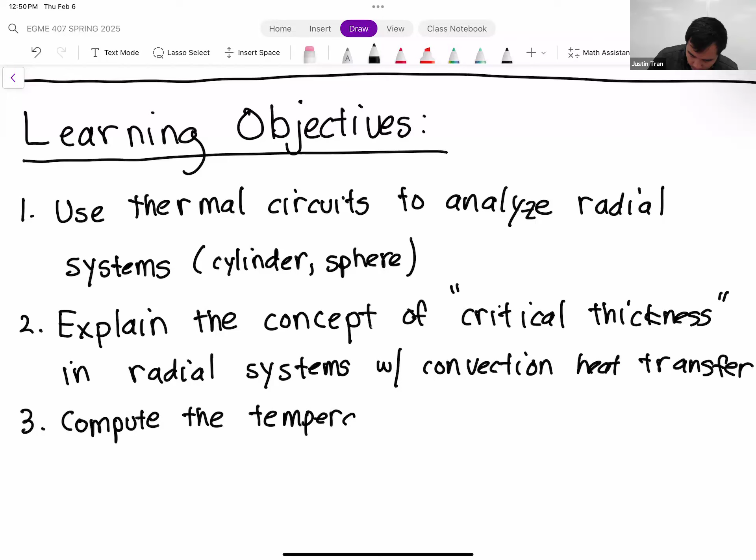That's so terrible. Man, inflation, even the Girl Scouts, huh? Even the nonprofits have to raise their prices. Same. Yeah, that's the problem, you can eat a whole box in one sitting. You could do that on purpose.

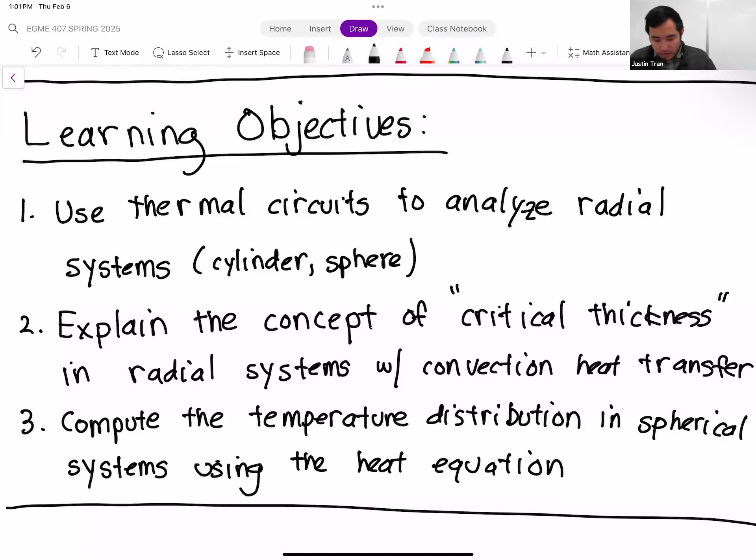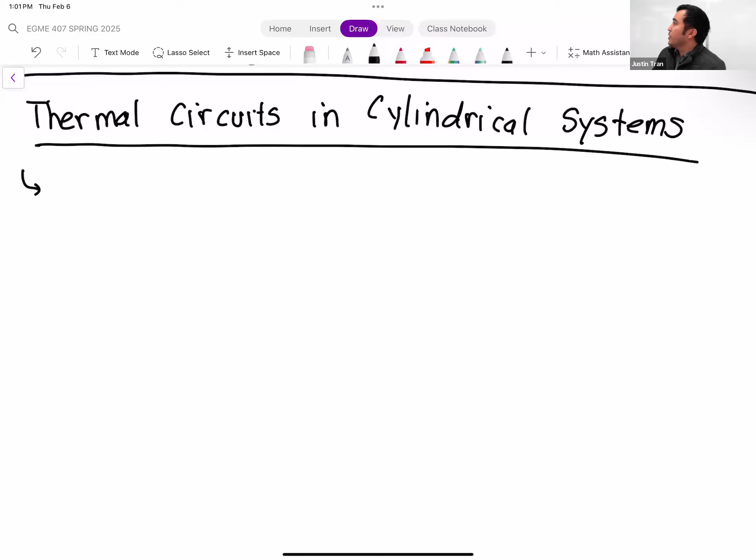All right, let's go ahead and get started. First thing we're going to cover is thermal circuits in cylindrical systems. This concept of thermal circuits that we first introduced in planar systems can also be used in cylindrical systems. Last lecture we didn't really do anything with it, but we did derive the equation for a thermal resistance in a cylinder.

Or I should say the conduction resistance. The situation we were looking at was this: if we look at a cross section of a cylindrical system, I won't draw the whole cylinder, just a slice. For a certain cylindrical system, we have an inner radius and an outer radius, an inner temperature Ti and outer temperature To. The radius at the inner part is Ri, and the radius at the outer portion is Ro.

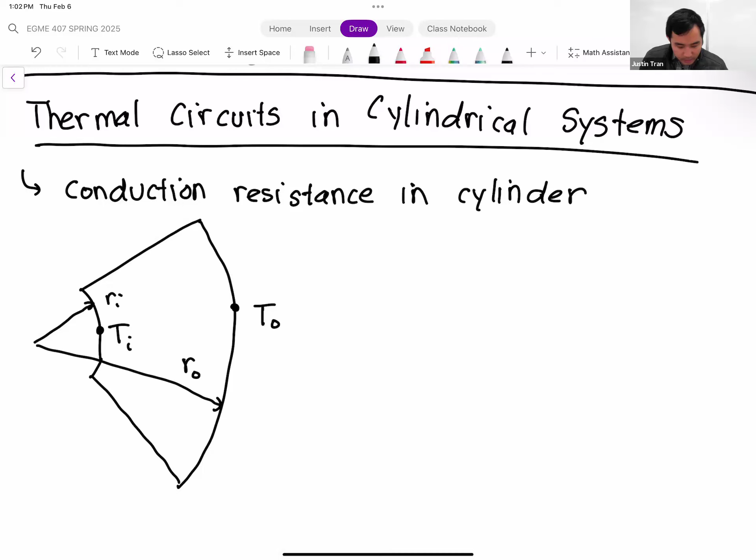So what we said last time is that we can compute this — let's say Ti is greater than To, so our inner surface is hotter than the outer surface. That's going to drive heat transfer outward. The equation we derived last time was that the heat transfer from the inner layer to the outer layer equals Ti minus To divided by the thermal resistance of that cylindrical layer. That resistance is the natural logarithm of Ro divided by Ri, divided by 2 pi K times the length of the cylinder.

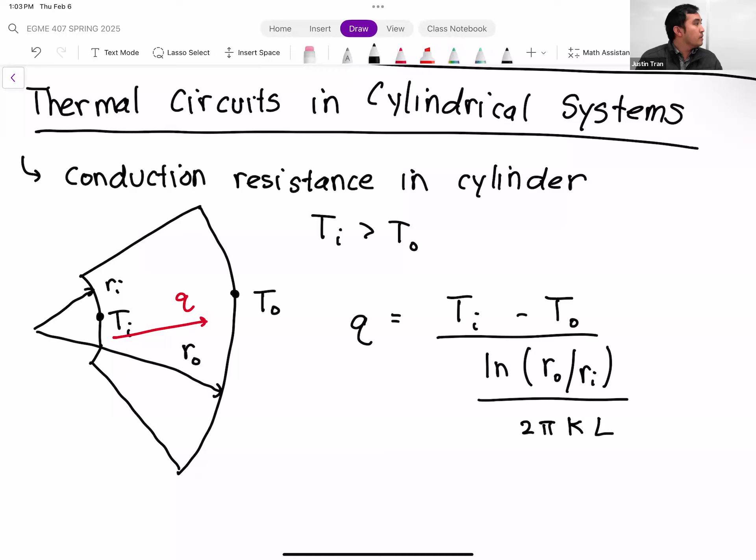And of course, the length of the cylinder — you can't really see it in this picture — but it's just the length in the direction going into the page. So this quantity right here is the conduction resistance of a cylinder.

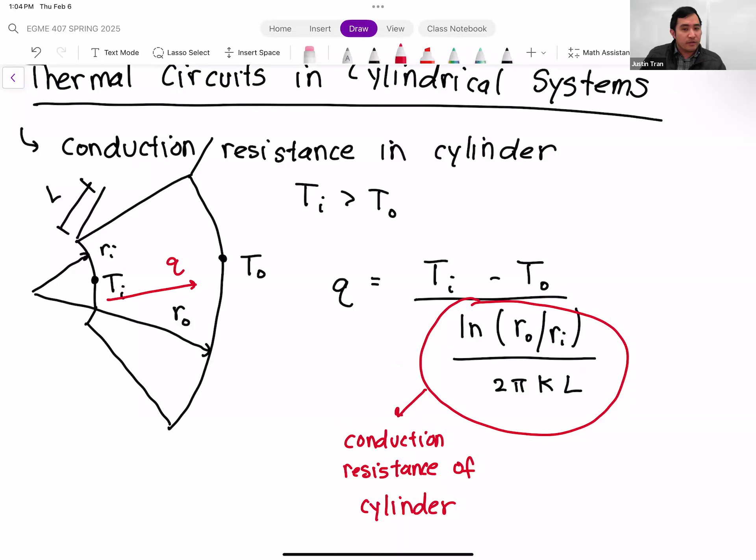Now, of course, this caveat here is assuming that the temperature is going from the inner part of the cylinder to the outer part — that part's really important. So I'm going to addend this to say this is the conduction resistance of a cylinder in the radial direction. Because there's a difference whether you have conduction going from the inner part of a cylinder to the outer part, or heat transfer going down the barrel of the cylinder — two different situations. This one is specifically just in the radial direction: heat transfer from the inside of a cylinder to the outside, or outside to inside. It works for either radial direction, but not going down the axial direction.

Okay, so let's see what this looks like in an example. Just like in the planar case, thermal resistance — question, yes? Does that inequality of the temperatures have to be true for that equation to be true? Not necessarily. If it's the other way around, if To is greater than Ti, the only thing that would change is that you would swap the order of these two terms. So you just want to make sure that the temperature difference is always positive.

So you do hot temperature minus cold temperature, but the conduction resistance itself doesn't change. What about the natural log? RO should be on top and RI would be in the denominator, so that one's always the same - you want RO over RI, because if the smaller radius was on top, the resistance would be negative.

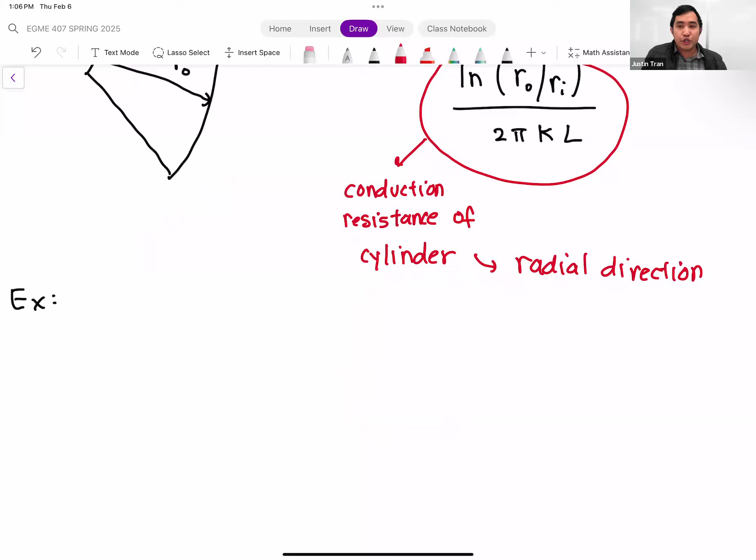Okay, so just like in the planar case, thermal resistances really shine when you have a multi-layer system. This is a common situation when you have multiple layers of different materials wrapped around the same cylinder. So let's say we have a situation like this.

This is quite common when you're doing some kind of thermal insulation. Maybe you have a pipe carrying some very hot liquid on the inside, and to protect the people on the outside, you have multiple layers of insulation covering this entire thing.

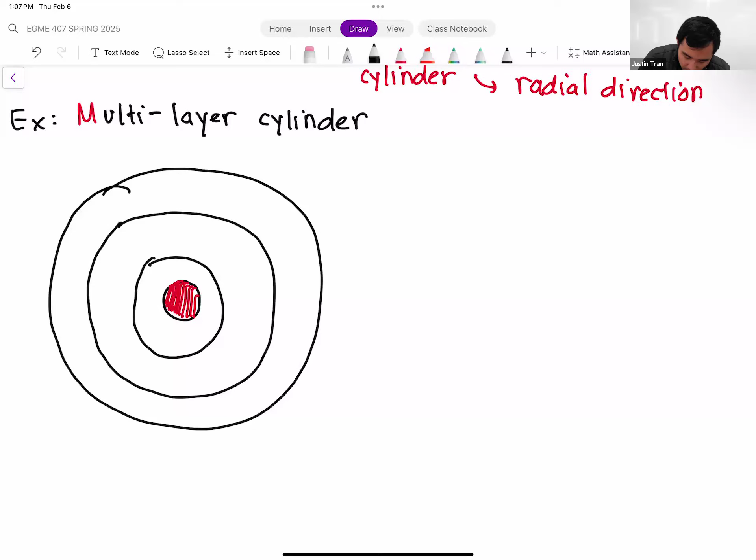Let's say this inner layer is really, really hot - I'll block it out like that. This layer has thermal conductivity Ka, this layer has Kb, and this third layer has thermal conductivity Kc. So we have 3 layers wrapped on top of each other. If we draw the radii here: this is R1, R2, R3, R4.

Other thing I'm going to draw here is, let's say we have convection on the outside - convection still exists in cylindrical systems. With convection we have a convection coefficient H, and the ambient temperature T infinity. One more thing we need: the temperature of the inner surface. Let's say at R1 we know that temperature, we'll call it Ti.

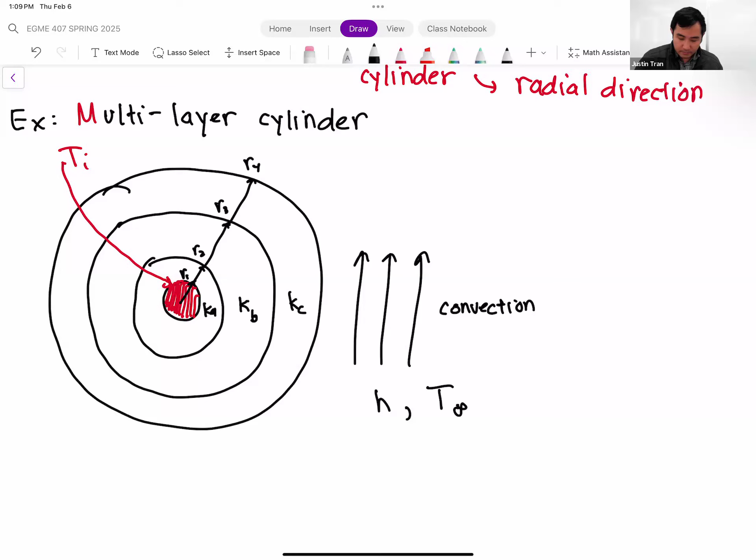So for this example, it's fairly straightforward, but let's write a question here. Let's come up with an expression - there's no numbers here since this example is meant to be fairly quick - that shows how much heat loss is coming from the inner part of the cylinder to the fluid.

Okay, so from the problem here, you can see it's asking for heat loss. Heat loss is just basically asking for Q - heat loss or heat gain is the same thing as heat transfer rate. So since we're solving for Q, if we scroll up here to our thermal resistance...

The easiest way to do that in this situation is to use a thermal circuit. The only difference here is that our thermal circuit is going to involve 4 resistors - we have 3 conduction resistors and 1 convection resistance.

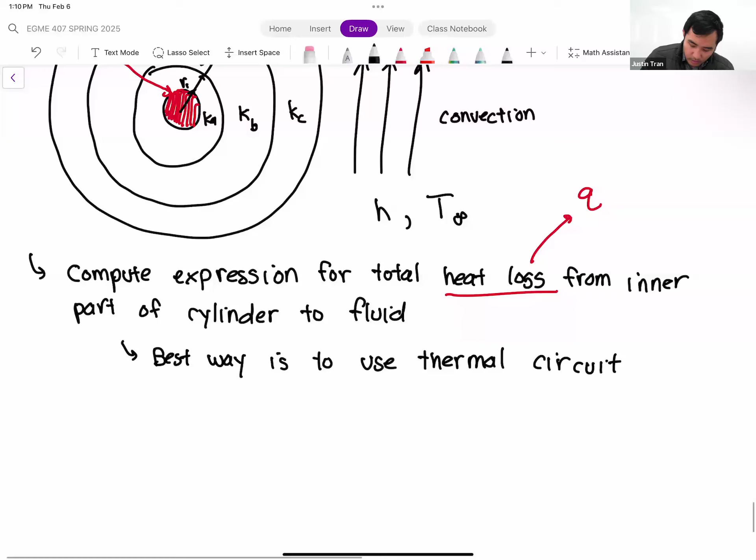Okay, so let's go ahead and draw the thermal circuit for this problem. Just like I noted, we're going to have 3 conduction layers. Each of those 3 conduction layers corresponds to our 3 materials: Ka, Kb, and Kc. And we're going to have 1 convection layer for the outermost one.

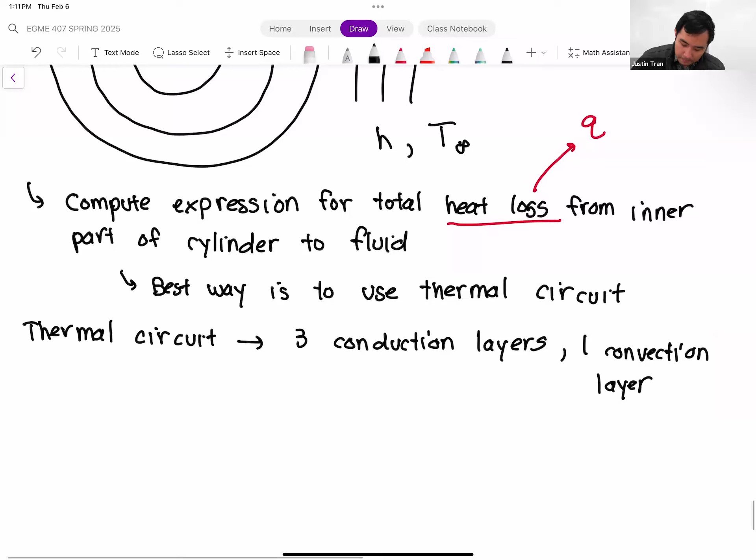So let's go and do that. Our leftmost node here is going to be Ti. Our outermost node here is going to be T infinity. And then in between those two nodes, we're going to draw our 4 resistors: 1, 2, 3, 4.

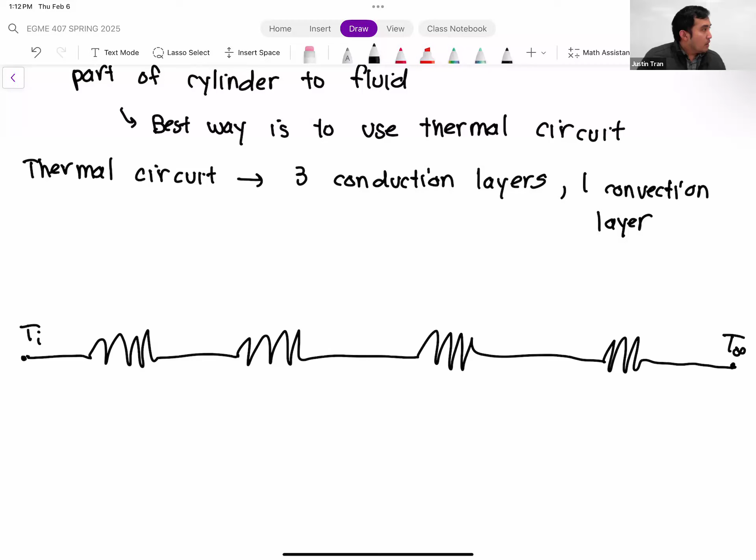All right, so let's go from the inside out. From the innermost layer bordering Ti, going to the next layer, we pass through material Ka, so we need the conduction resistance of that layer - this is going to be R conduction 1. Let's plug in our formula for conduction resistance.

So we have ln - the outer radius of that layer is R2, the inner radius of that layer is R1. So we have ln of R2 over R1, divided by 2 pi times K of that layer, which is Ka, times the length.

And we're going to assume that we know the length of this pipe here.

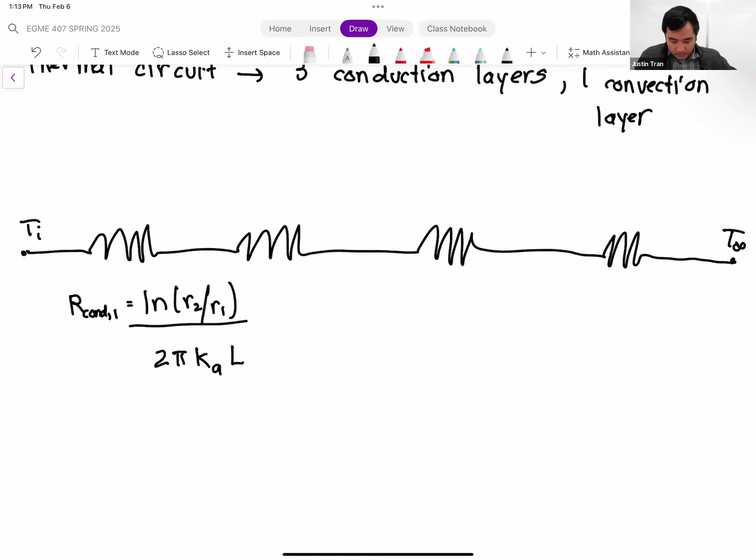Okay, so that's our first resistance, right? So going through material Ka.

Once we reach radius R2, we're going to pass through another layer, layer Kb. Let's go ahead and write out the conduction resistance for that. So our formula here is going to be the same, except we're just going to swap out the values here. So for layer B, we have ln of R3 divided by R2, divided by 2 pi Kb times L.

Once again, utilizing the same formula here, but with the different radii, because for layer B right here, the outer radius is R3, inner radius is R2, okay?

Our third resistor here is also a conduction resistance, and so we have natural logarithm of R4 divided by R3, divided by 2 pi Kc times L.

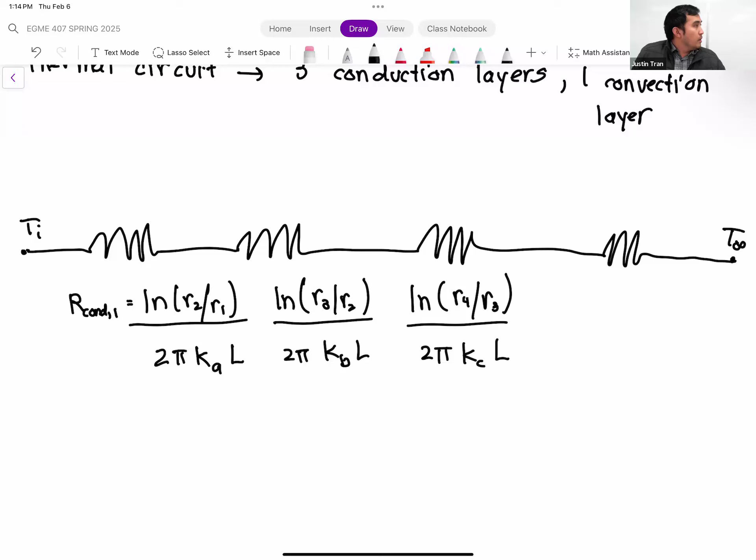So that's pretty straightforward. We have 3 conduction layers, 3 conduction resistances. You want to be careful here because it gets a little bit repetitive sometimes when you're applying the same formula. So just make sure, especially when you're plugging in numbers, you plug in the correct values for the radius and the correct values for thermal conductivity for each layer, right?

Just the way that heat transfer is, a lot of times we solve the problem first using symbols and then we plug the numbers in after. Just be careful as you're plugging numbers in, because it's easy to miss something in the details.

All right, any questions on this so far? What is the L? The L is the length of the cylinder going into the page.

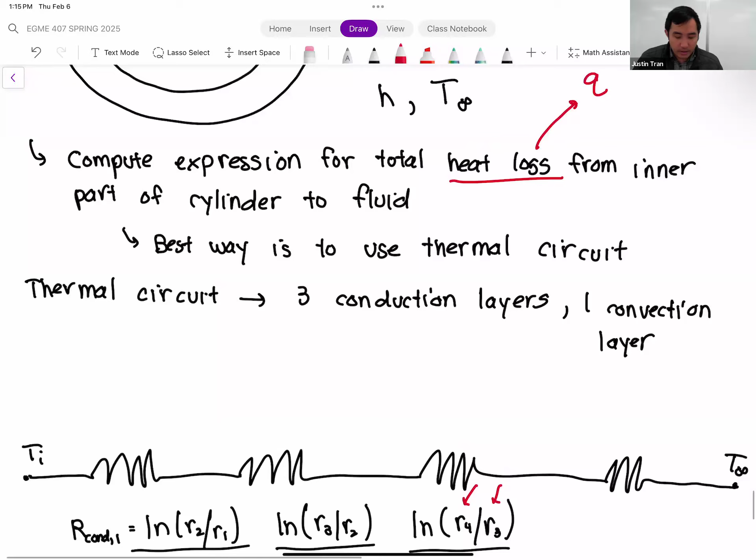It's a bit hard to see because I always just draw the cross section, but the cylinder actually goes into the page in that direction, so the L kind of represents that length.

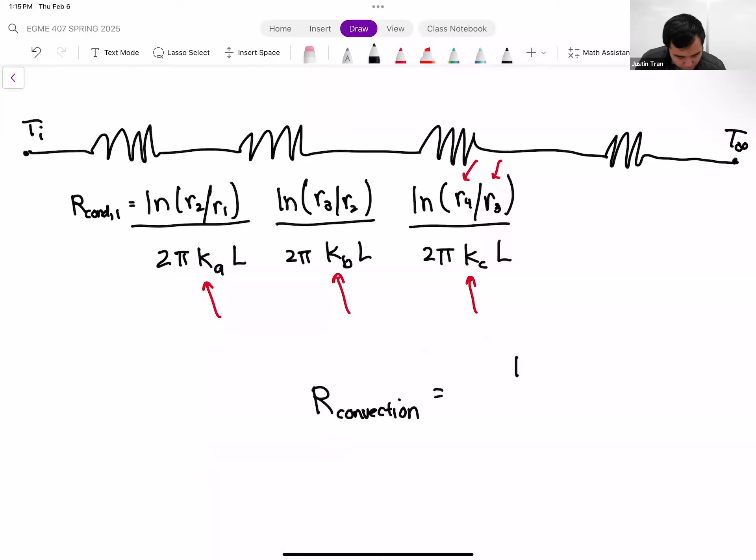So if you remember, our convection resistance was equal to 1 over H times A, where this A right here represented the cross-sectional area across which the heat transfer was taking place.

I want to bring this up again because in a planar situation, back when we were in good old Cartesian coordinates, we had convection going across here, and we had heat transfer coming out here. This cross-sectional area, if you look a little bit closer, was the area that was perpendicular to the direction of heat transfer.

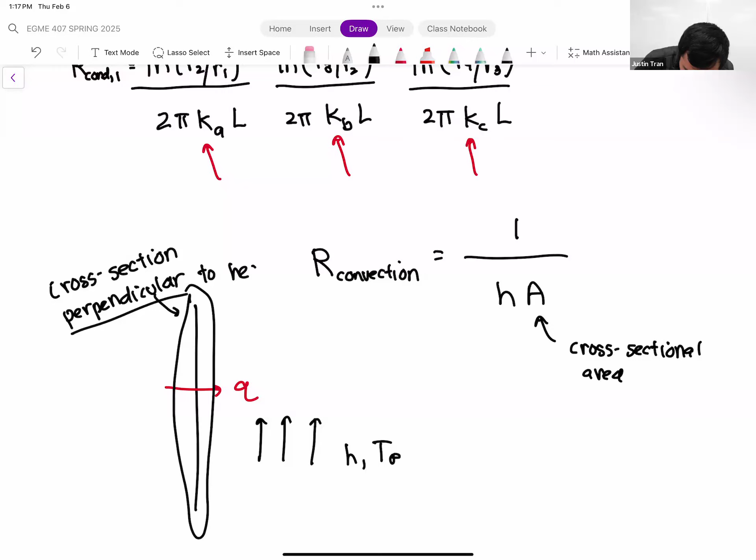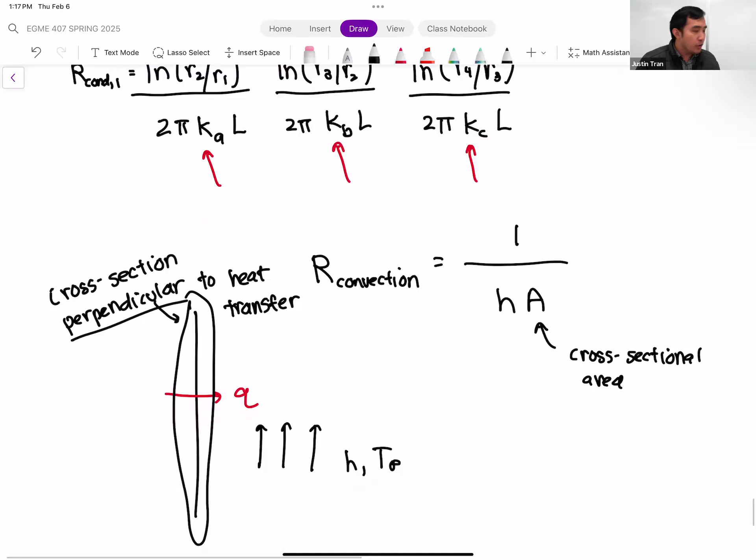So basically, we looked at the direction of Q, and then we found the area that was perpendicular to that, and that's the area that we plugged into our convection resistance here. Now you have to be careful with radial systems because you want to make sure that you plug in the correct area. So we're going to use the same formula here.

So this last resistance here is just 1 over H times A. But now the question is, what do we plug in for the area for this expression here?

So if we come back up to the diagram here, one thing you might say is, okay, the convection heat transfer is occurring on the outermost layer right here, right? So we have this circle here, which has radius R4. And so you might say, okay, that area that we're going to plug in should be pi R4 squared, because that's the area of a circle, right?

But if you look, that area is this one right here. That's the area that we kind of see in the page. That's not the area that's perpendicular to the heat transfer, because we know the heat transfer is going from inside out.

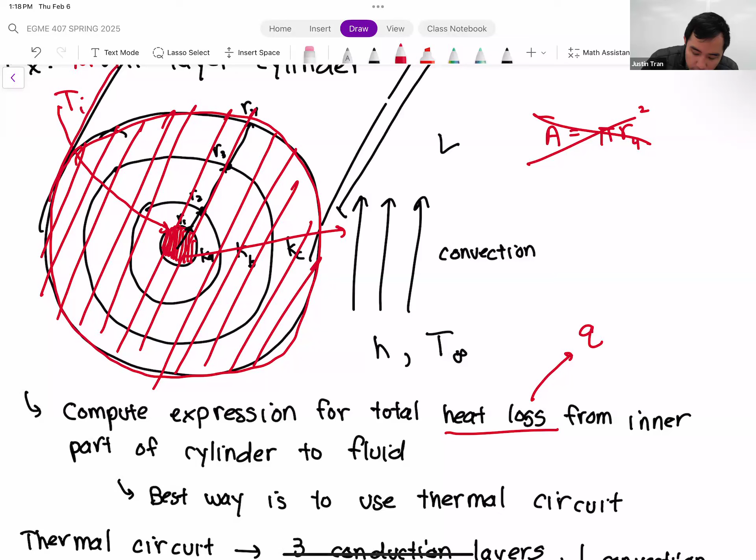So that area is not actually the area of the circle. The area that we actually want is actually the surface area of the cylinder on the outside. Specifically, it's the surface area of the cylinder that's bordering the fluid, or that touches the convection fluid.

In fact, there's a little bit of a hint in our conduction resistances too, because we partially have that area here. That area that we're plugging in there, the surface area, is 2 pi R4, which is the perimeter of the cylinder multiplied by the length of the cylinder.

You want to be careful because when you're computing convection resistances, you always want to compute surface area, because that is the area at which the heat transfer is going past. Later on, we're going to go over convection resistance for a sphere, and that's going to be kind of the same thing where we would use the surface area of the sphere as our area. Any questions on that? Why we choose that area there?

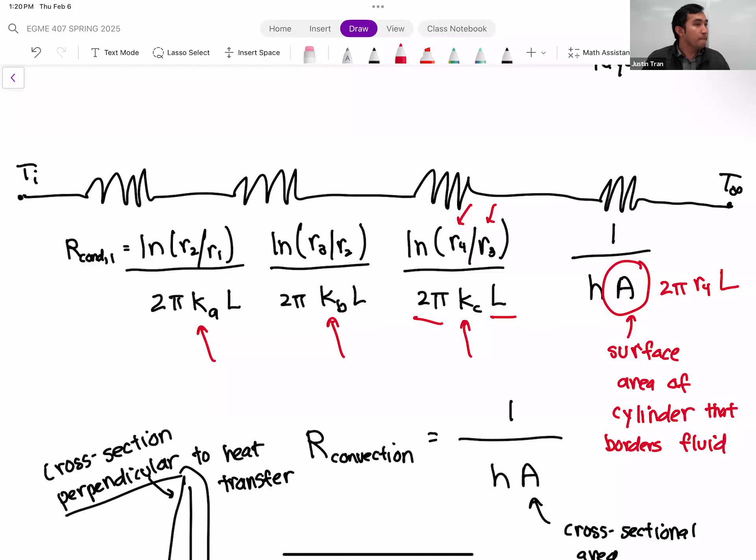Now that we have our thermal circuit complete, let's go ahead and write out our expression for the heat loss.

So Q loss here is going to be equal to, it's going to be a fairly long expression because we have 4 resistances, but we have Ti minus T infinity up top. And then on the bottom, we're going to sum up all of our resistances here. So we have natural logarithm of R2 divided by R1, divided by 2 pi Ka times L, plus natural logarithm of R3 divided by R2, divided by 2 pi Kb times L, plus natural logarithm of R4 divided by R3, divided by 2 pi Kc times L. It's even getting repetitive for me to just say all these natural logarithms. And then we have the convection resistance, so it's 1 over H times the surface area, which is 2 pi R4 L.

And of course, if you have numbers for all these things, you have numbers for the temperatures, the radii, the thermal properties, the convection coefficient, then you can plug in here and get a number for that.

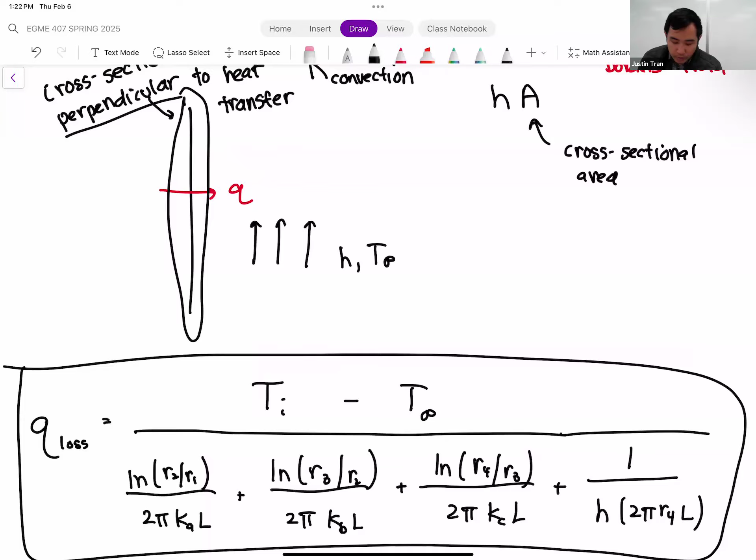Not quite, because the area is kind of always changing, right? Because the heat transfer is going radially outwards, the surface area for that heat transfer is actually changing quite a bit. In this case, you can pull out the L, so that is one thing you can pull out. If you look at every term here has an L. So you can do a heat transfer per length, which doesn't quite have a name. The heat transfer per area is called heat flux, but in this case, we can do heat transfer per length. So that is one thing you can do, but because that cross section is changing, it's a little bit harder to compute the heat flux. Thank you, good observation.

So that is thermal circuits in cylindrical systems. Now, before we move on to spherical systems, there is one thing that I do want to highlight here, which is actually quite fascinating. And that question kind of segues into that really nicely.

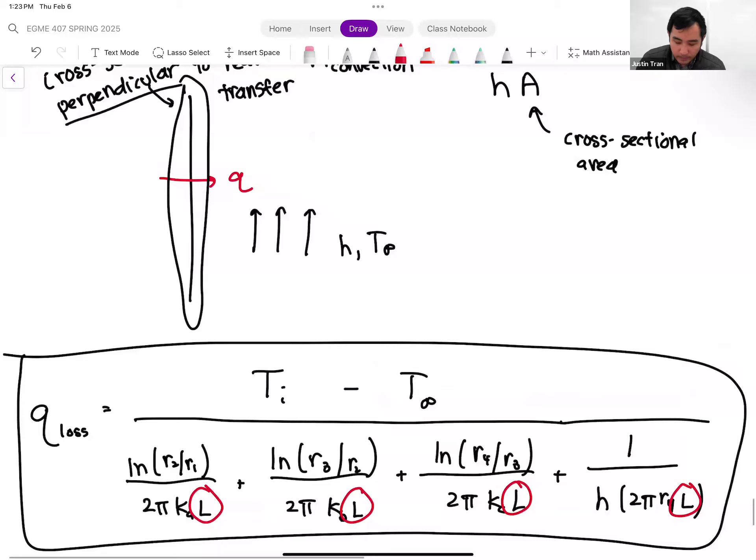Let me take that situation from above and draw a smaller version of it. I'm going to draw a version that just has one conduction layer and convection. So we have one cylinder with one layer here, and we have convection on the outside. We have an inner radius, outer radius. Convection, we'll assume we know everything about that - the convection coefficient and the ambient temperature. And we'll assume that we know the inner temperature of the inner cylinder, Ti.

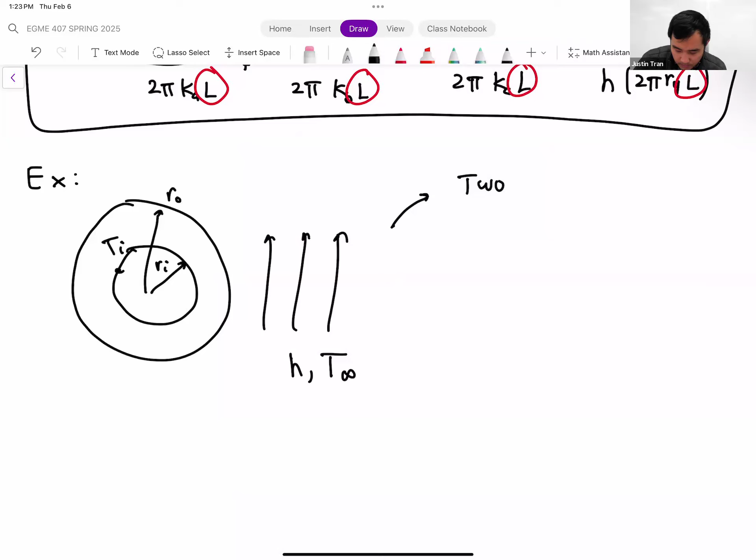So this system right here has two resistances: one conduction resistance, one convection resistance. I'm not going to draw the circuit just because it's very obvious, but I do want to write out the expression for both of the resistances. So we have conduction resistance is equal to natural logarithm of ro divided by ri, divided by 2 pi K times L. And then convection resistance for a cylinder is 1 over H times 2 pi ro times L.

So similar situation as the last time, I just took off two of the layers here. So why are we looking at a simplified version of the last example? I want to highlight one particular variable here.

Which is the outer radius. You can see the outer radius actually appears in both expressions here, in the conduction resistance and the convection resistance. But the position, or where that outer radius actually shows up in both equations, is actually different.

If you look at the conduction resistance, the outer radius appears in the numerator of that expression. Now we're taking the natural logarithm of it, so that's going to affect its value, but at the end of the day, it is in the numerator.

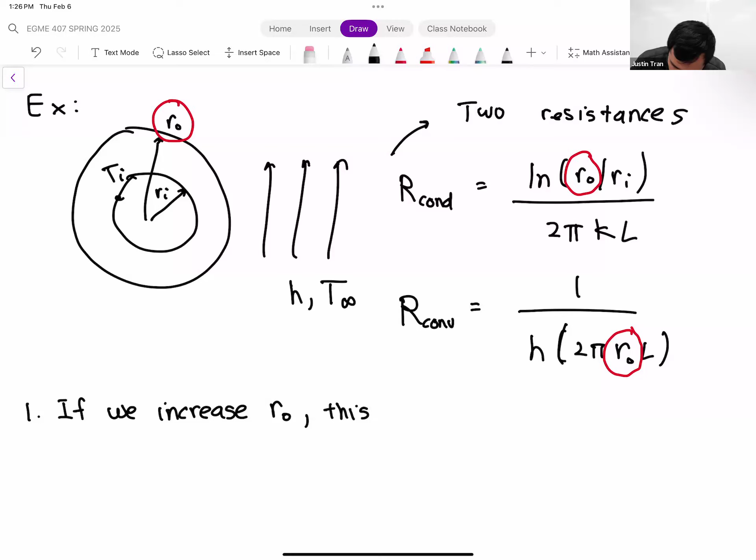That intuitively makes sense, right? If you think about the situation from last time, if you have a very hot fluid on the inside, you want to insulate the outside so you don't burn yourself when you touch the pipe. The instinctive thing to do is just to make the insulation thicker. If you make the insulation thicker, it's going to cause more resistance to heat transfer, and it's going to overall reduce the amount of heat loss that comes out. So that makes sense.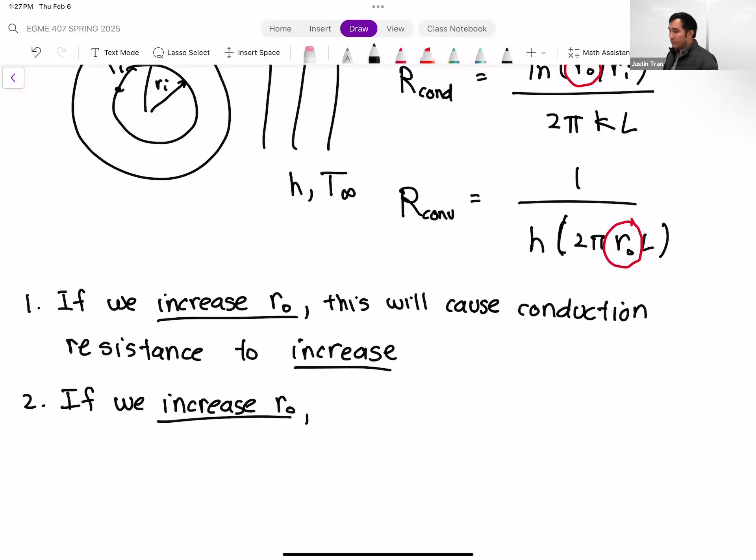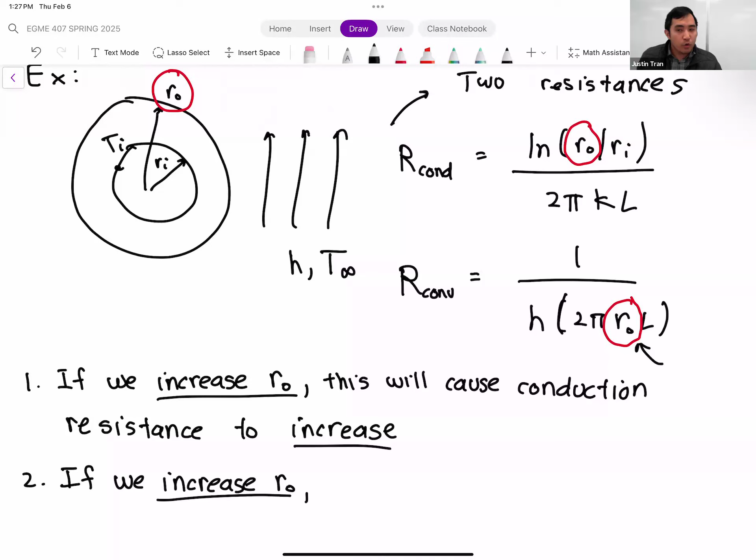But if you look at the convection resistance, and if we consider the same phenomenon, let's say if we increase Ro, so we make the cylinder thicker. But if you look at the formula for the convection resistance, Ro is actually in the denominator. So what does that mean? If you make your denominator bigger, that's going to make your quantity smaller. So the convection resistance actually has the opposite effect. If we increase Ro, this will cause the convection resistance to decrease.

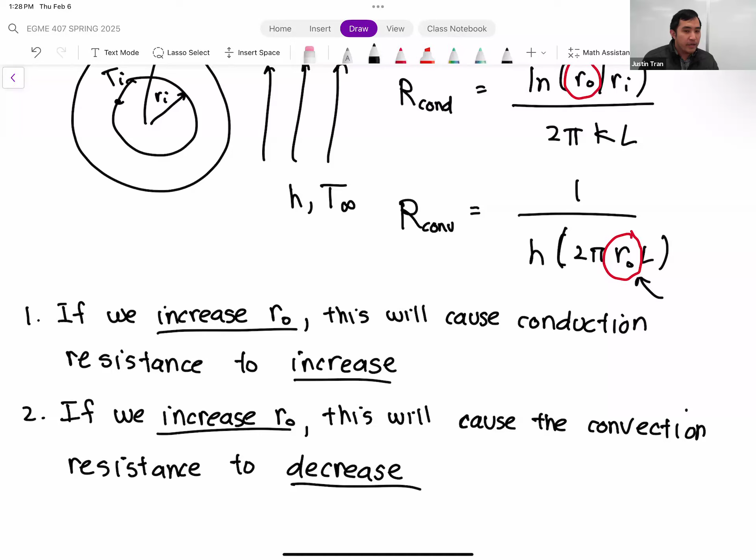Now that seems like kind of a paradoxical thing. But if you think about the way convection works, convection is a surface effect. Convection basically tells you how much heat is being lost to a fluid that's in contact with the surface. Now radial systems are unique in that as you increase the radius of a radial system, you take a cylinder, you increase its radius, you're also increasing the surface area. And increasing the surface area means that there's just more places or more area for the cylinder to lose heat due to convection.

So this connection between surface area and convection heat transfer is actually a very important, I would say, design consideration when you're thinking of thermal systems. I'm going to jump ahead a little bit.

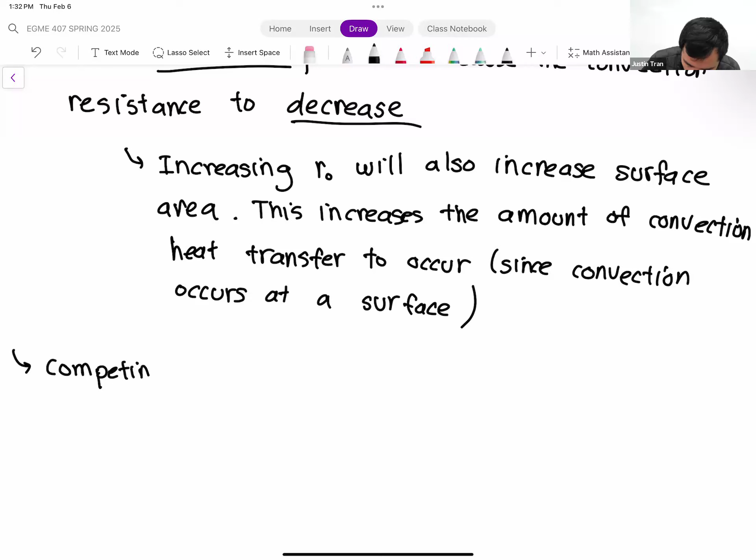So on the one hand, if you increase the radius, you're making it harder for conduction heat transfer to occur, but you're also making it easier for convection heat transfer to occur.

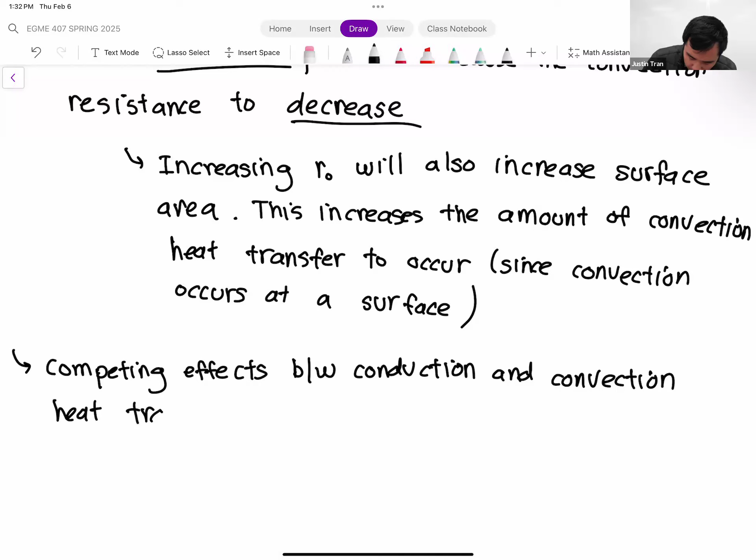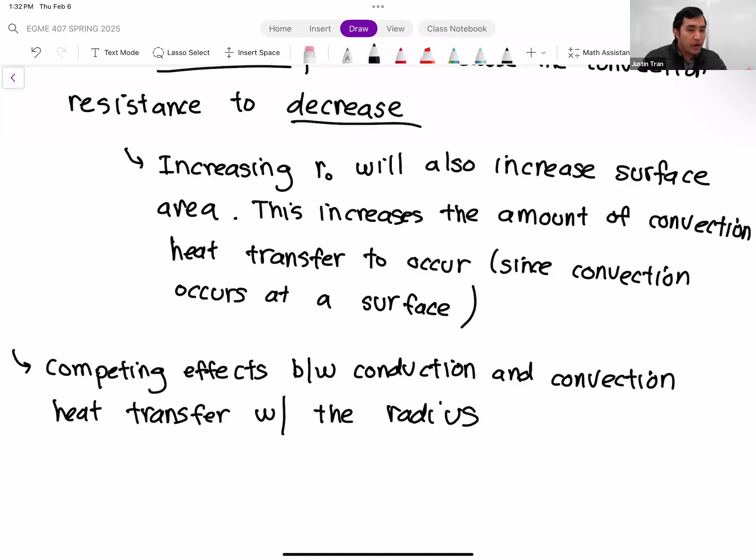Competing effects is one of the most fascinating things that can occur, in science, economics, finances—whenever you have two things competing, it means whenever you do one thing, you're trading off the other. One thing this always implies is that there's always some kind of sweet spot.

So whenever you have two competing effects shown mathematically, there should be some kind of sweet spot where both effects are minimized, or there's a nice balance between the two.

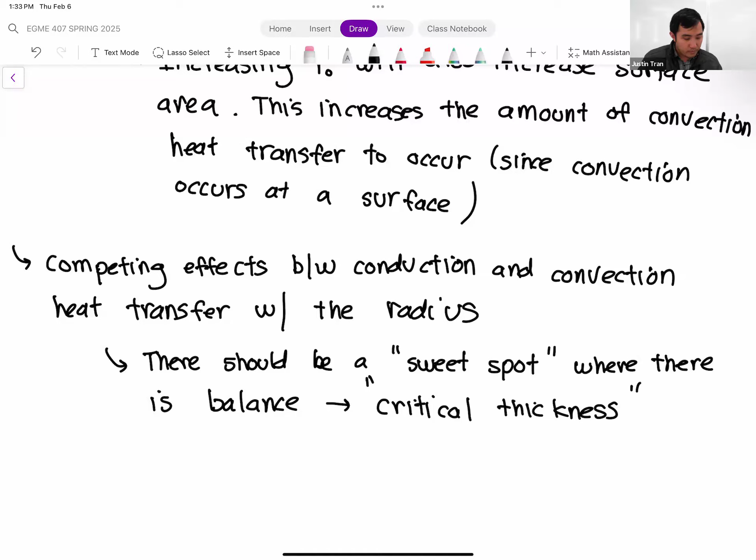And so this idea gives rise to something called the critical thickness of a cylindrical system. So what is this critical thickness?

So to compute the critical thickness, or even to just understand what it is—question, yes, sorry, right in front of me.

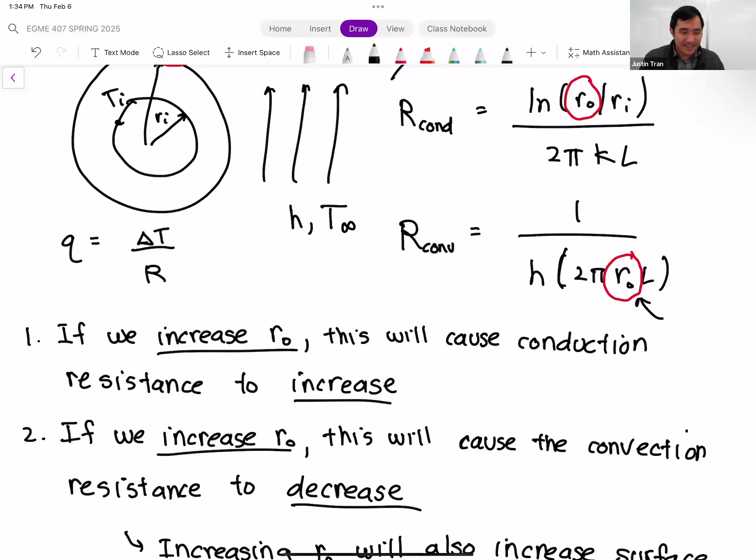So you're saying when you increase the outer radius, then conduction resistance increases. Yes. But conduction heat transfer decreases. Yes. And then vice versa for convection. Exactly. Okay, just making sure, because the fundamental formula we have is Q equals delta T divided by resistance, right? So if resistance goes up, then heat transfer goes down. Thank you, sometimes I get so into it.

Just say something in those situations. Okay, all right, so first let's write out an equation for the total resistance.

So total resistance here is just going to be the sum of our conduction resistance and the convection resistance. So we have ln of Rho divided by Ri, divided by 2 pi K times L, plus the convection resistance, which is 1 over H times 2 pi Rho L.

So that's the total amount of thermal resistance that's going to be there in our system. Now, the variable in question here, of course, is the outer radius.

So to find a sweet spot, or where these resistances are going to balance, let's take the derivative of this total resistance with respect to that outer radius.

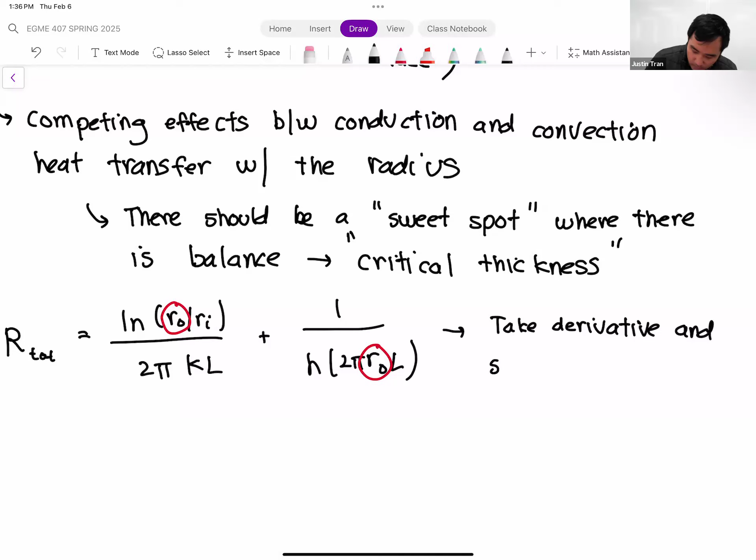So thermal conductivity K, does that not play into the convection resistance? Why? Yeah, so the thermal conductivity is just a material constant of the solid cylinder itself, whereas convection is the amount of heat going to the fluid on the outside. So the thermal conductivity only plays a role in conduction, but not in convection.

Solid, exactly. Yeah, so the conduction resistance basically represents the heat transfer through that solid part of the cylinder, whereas the convection is the heat transfer to the fluid part itself.

So I know we'll probably get to this when we're talking more about convection, but do different gases interact with heat differently? Yep, yep, so actually every fluid, every liquid and every gas has its own thermal conductivity too.

So it's not just something unique to solids. It's just usually for liquids and gases, they're usually in motion. And so the convection coefficient H actually factors in that K for that fluid also into account. So that H is a combination of both the thermal conductivity of that gas or liquid, as well as its motion.

The motion of the fluid. Exactly, yeah—like pressure gradient across the surface? Yep, as well as if it's laminar or turbulent, that's going to play an effect too.

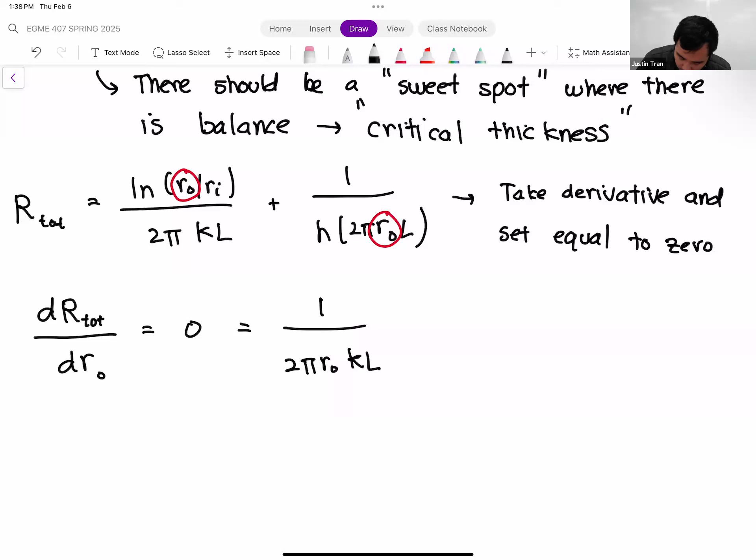All right, so we're going to take the derivative of the first term there. The derivative of that first term is 1 over 2 pi Ro times K times L, because we're basically taking the derivative of the natural logarithm of Ro, so the derivative of that is just 1 over Ro. And then the derivative of the next one is minus 1 over H times 2 pi Ro squared times L, because we're just taking the derivative of Ro to the minus 1 power. So that minus sign comes out in front, and then Ro becomes Ro squared.

Okay, so now we can take this expression and solve it for Ro, right? Because we have an expression here set equal to 0. Luckily, we have a lot of terms here that are going to cancel out. We have 2 pi on both terms, so I'm just going to cancel those out. We have L on both terms, so that's going to cancel out as well.

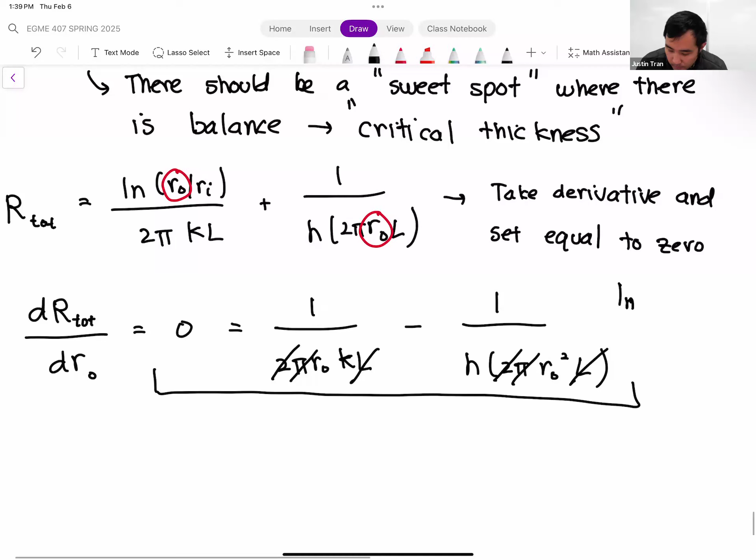Question: is the Ri included in this first derivative? So in this case, Ri is just a constant. Remember, ln of Ro divided by Ri, we split that up into two natural logarithms: ln of Ro minus ln of Ri. And ln of Ri is just a constant, so when we take the derivative, it just goes away.

Okay, so we have all those terms cancel out, and so we have 0 is equal to 1 over Ro times K minus 1 over H Ro squared.

Question: can we cancel one of the Ros? You could, yes, and in fact we will. So let's cancel one of the Ros, and solve this for Ro. Let's put the 1 over H Ro on this side, this is equal to 1 over K. Let's just invert this whole thing, so we have H Ro is equal to K. Just doing some fast algebra here, and then Ro we get is equal to K over H.

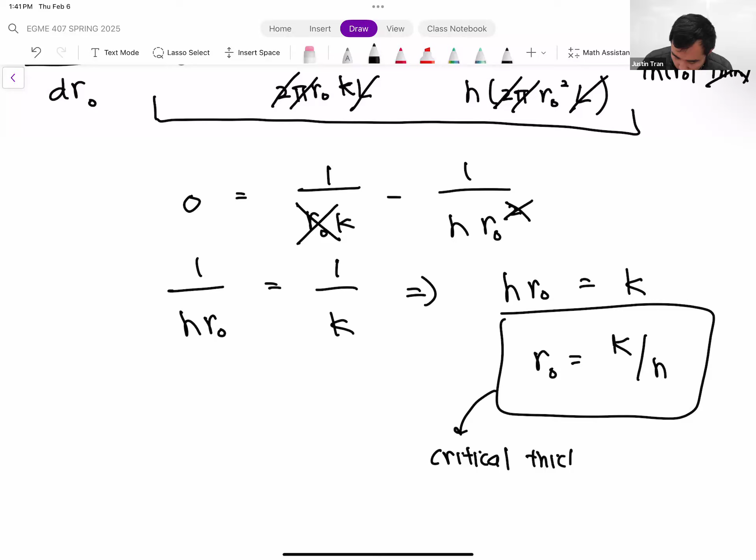No, it actually has units of length here because it's a radius. This value of Ro represents the critical thickness of a cylindrical system.

Is K and H, are those material properties? The K is a material property of the solid, of the cylinder, but the H is a property of the fluid. It depends on the thermal conductivity of the fluid itself, but also on the motion too. H is something we're going to solve for in the second unit on convection, and H can vary quite a bit depending on whether you have a still fluid or a fast moving fluid. But when it's like steel or anything like that, the K will always be consistent, despite the size. The H is usually something you have a much bigger influence on, because you can put a fan there, or change the properties of the fluid a lot more easily than the solid itself, because the solid usually has a fixed thermal conductivity.

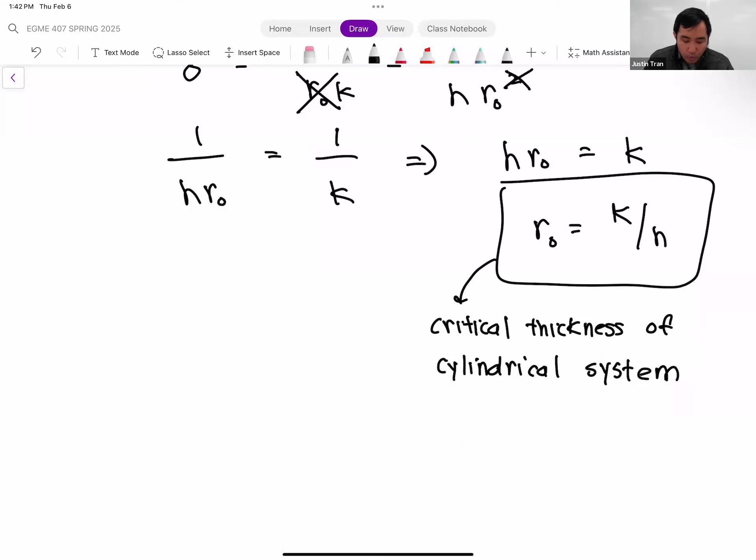Okay, so we've solved for where the conduction and convection resistance are balanced. We basically found where the total thermal resistance reached a maxima or minima. You can take one more derivative of the total resistance to determine if this is either a max or a min. This is optimization all over again.

So it turns out, I'll spare you the math, but I do want to get to the spherical stuff. It turns out this critical thickness here is a minimum of the thermal resistance.

And so if you plot out the total thermal resistance of a cylindrical system as a function of the outer radius, it actually shows almost like a parabolic type of behavior. There's a certain regime where as you increase the radius, the total resistance actually goes down.

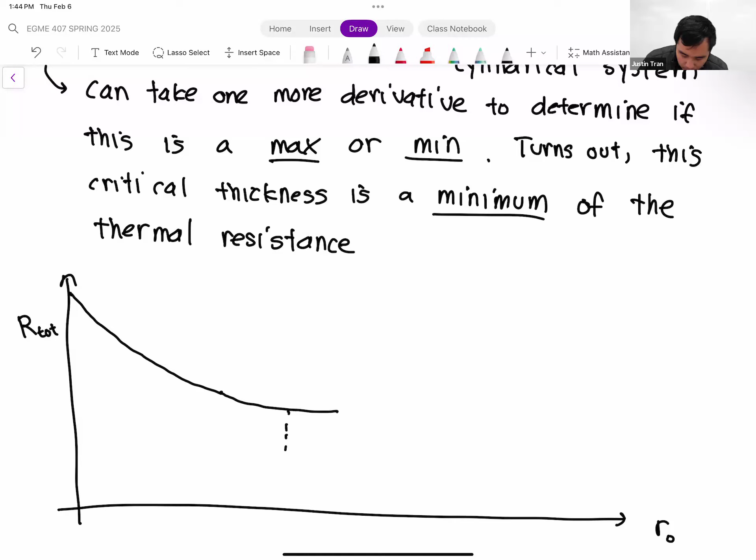Which is really fascinating, because intuitively, what most people think is that when you have a system, to increase the resistance you make it thicker. But sometimes you could actually be making the situation worse just by increasing the surface area. Eventually, this curve is going to bottom out at its minimum. This minimum right here is the critical thickness, and then it's going to pick back up again.

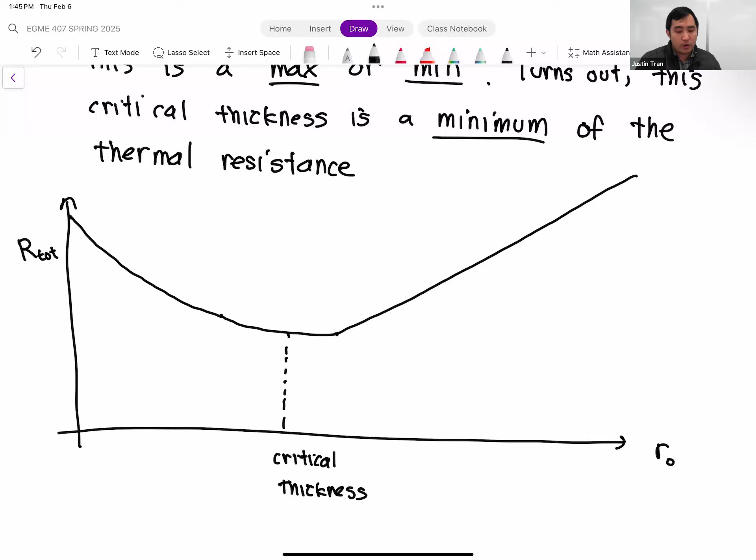This concept of critical thickness shows that by adding insulation, sometimes you actually make it easier for heat transfer to occur. This is unique to radial systems, which is why it's its own unit in heat transfer. Usually in fluid mechanics or solid mechanics we don't pay much attention to cylindrical or spherical coordinates, but here it makes a big difference because you'll often be designing cylindrical or spherical systems, and you need to be aware of critical thickness so you don't accidentally make the situation worse by adding more insulation.

Does it end up being a pretty smooth curve, or more like big jumps? It's pretty smooth, smoother than what I drew. You basically have a competition between 1 over R and ln of R. Eventually the 1 over R term dies down and the curve starts to look like a natural logarithm.

This is about checking to make sure you're not making the situation worse. If you're in this regime right here, and you're trying to insulate a system better, asking yourself whether to add more insulation, if you add more insulation in this regime you're actually reducing the thermal resistance. That means more heat loss is occurring. So if you're going to add thermal resistance, you want to add enough to make sure you're in the other regime.

So once you get past that threshold, it just increases linearly? Exactly, it is linear-looking, though it's actually natural logarithm, which looks linear at higher values.

So that is the concept of critical thickness. There's the same concept of critical thickness for a sphere as well, so you can go through that exercise. We won't do it in lecture, but it's a good exercise to work through to see what the critical thickness for a spherical system is. Speaking of spheres, let's move on to those.

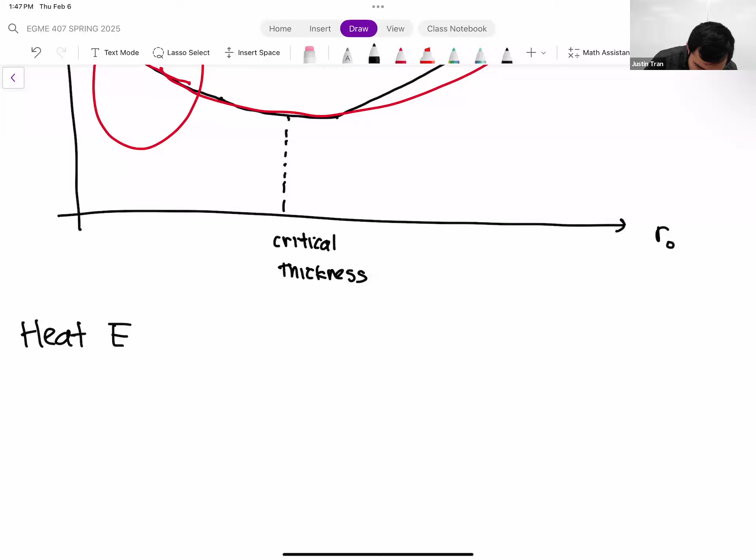Let's look at the heat equation in spherical coordinates. Just like we did with the cylinder, and just like with planar systems, I'm going to write out the full heat equation in spherical coordinates, but be aware that a lot of these terms will cancel based on our assumptions.

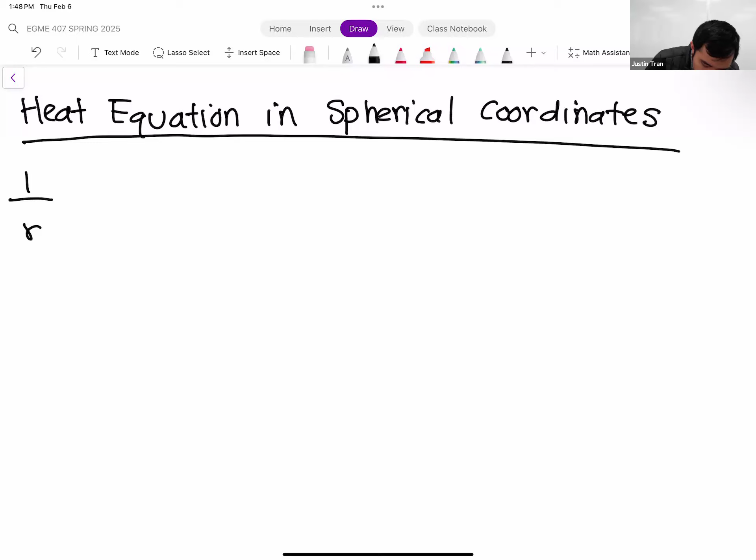So the full heat equation: 1 over r squared, partial with respect to r of k r squared partial T partial r, plus 1 over r squared sine squared theta, partial with respect to phi of k partial T partial phi. In spherical coordinates we have two angular coordinates, theta and phi, and I'll draw the difference right after this. Plus 1 over r squared sine theta, partial with respect to theta of k sine theta partial T partial theta. That's the scary part. Plus q dot equals rho cp partial T partial t.

The second term is sine squared and the third term is not sine squared. Exactly, yeah.

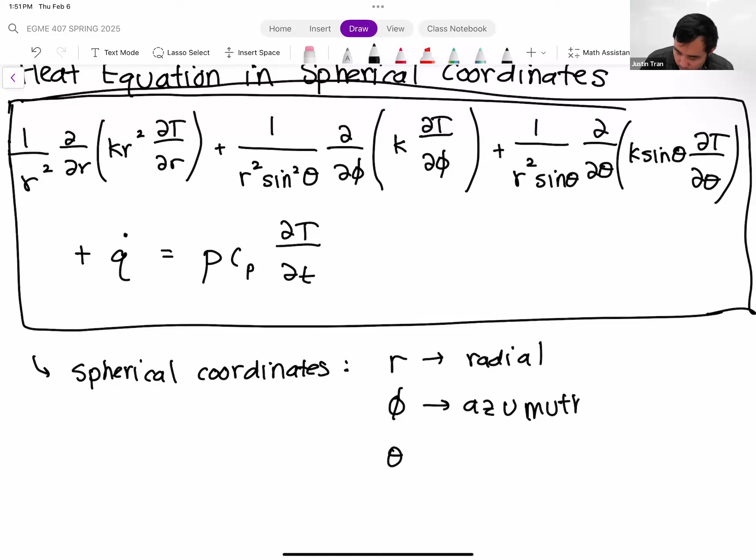This equation assumes spherical coordinates, and the three spherical coordinates are r, phi, and theta. R here is the radial coordinate, interpreted the same way as with the cylinder, except now pointing from the center of the sphere out towards the outside. Phi here is known as the azimuthal angle, and theta here is the polar angle.

Okay, so if you draw it out, you draw a sphere here, something like this.

The spherical coordinates are going to assume that you start from the inside of the sphere. Just like before, the radial coordinate goes from the inside to the outside. The polar coordinate is this angle right here, so it's an angle that's kind of in the plane. And the azimuthal angle, it's a little hard to tell, but it's an angle that's in the plane perpendicular to that.

Now, of course, we're never going to solve this entire full equation here, so we're going to be applying a lot of assumptions. Basically, any derivative with respect to an angle here, we're going to assume it's 0.

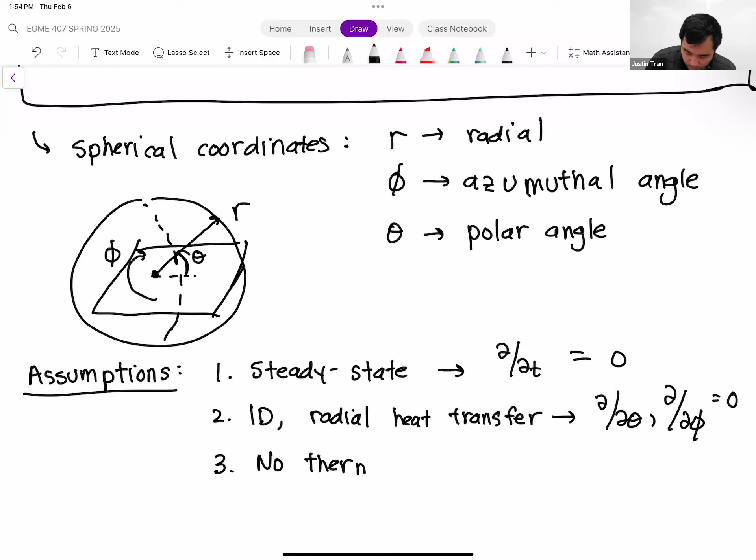And the last one that we'll make most of the time is we're going to assume that there's no thermal production. No thermal production means that the Q dot term is going to be equal to 0.

So we apply these assumptions to our heat equation. It's going to cancel out basically every single term except for one. Let me come up here. The first term, that's the only term we're going to keep because that has derivatives with respect to R.

Second term, we have derivatives with respect to an angle here, so that's the derivative with respect to the azimuthal angle, and that's going to be 0. Third term, we have derivatives with respect to the polar angle, and we're also going to assume that's 0.

Next term, we have thermal production, so we're just going to be setting it equal to 0 as well. And then finally, the unsteady term has a derivative with respect to t, and that's going to be equal to 0.

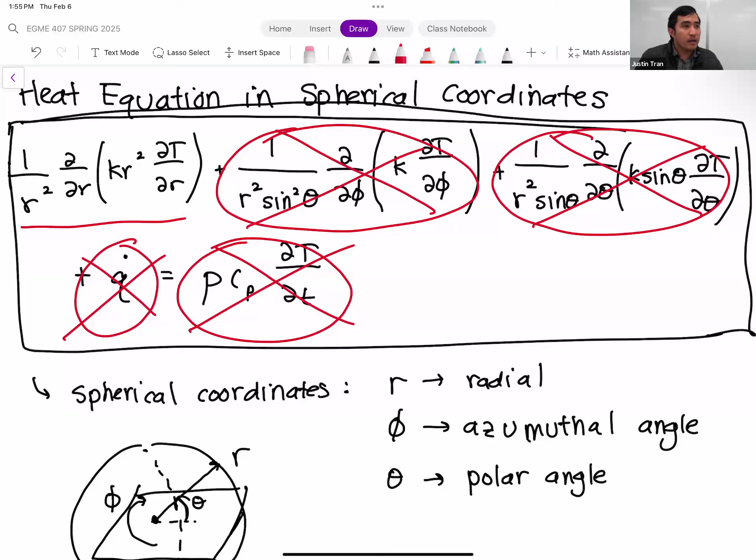So in reality, if you had a generic 3D spherical system, you could solve all of these terms at once, probably using some computer software. But for our purposes, just so we can solve them by hand, we're going to assume most of these are 0.

So all that we're left with after all of those cancellations is just this one term. Let me go ahead and write it out. After applying all those assumptions, all that we're left with is 1 over r squared, d/dr of K R squared dt/dr, all equal to 0. Since we only have one independent variable left, I'm going to change that derivative to a regular derivative.

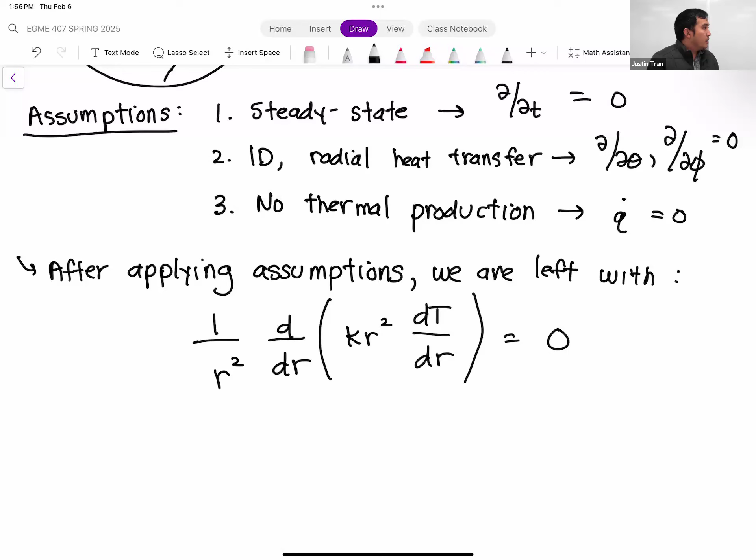And so that's going to be the starting point for our first example that we're going to do today. Any questions on that, on how we got to that point?

Alright, so last thing we're going to do today, let's solve this equation for a very classical case. Just like we did for the planar system, just like we did for the cylindrical system, let's solve this heat equation for a situation where we have two prescribed temperatures.

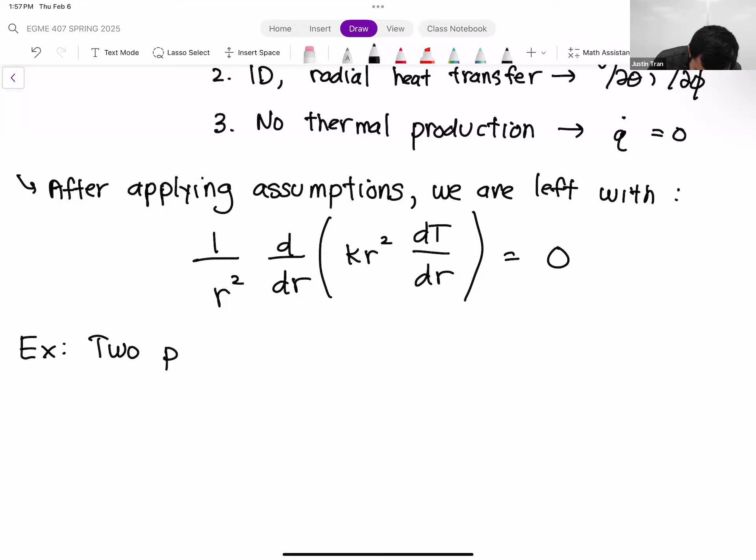Okay, so we're going to have a hollow sphere. I know it looks like a cylinder, but assume that there's a curve there. So this is a sphere. We have an inner radius Ri and an outer radius Ro. The inner radius has a temperature Ti, and the outer radius is temperature To.

Right, so that's going to give us the following boundary conditions: T at Ri is equal to Ti, and T at Ro is equal to To.

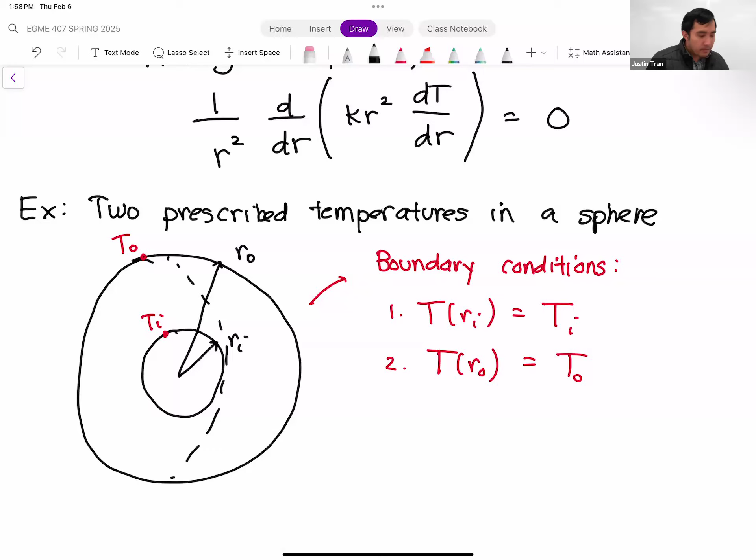So this is a classical situation: two prescribed temperatures, hollow sphere, inner and outer radius. Just like we've done quite a few times already, let's solve the heat equation for the temperature distribution inside the sphere. All of the assumptions we're going to make are the same as above.

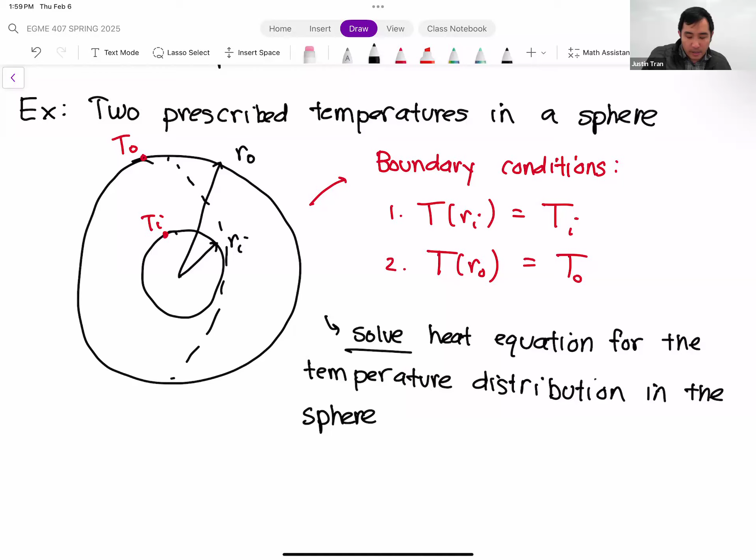For this example, I'm going to start from this heat equation that we have here, but just know that we got this from the full heat equation after canceling all those terms. Any questions on the setup for the problem?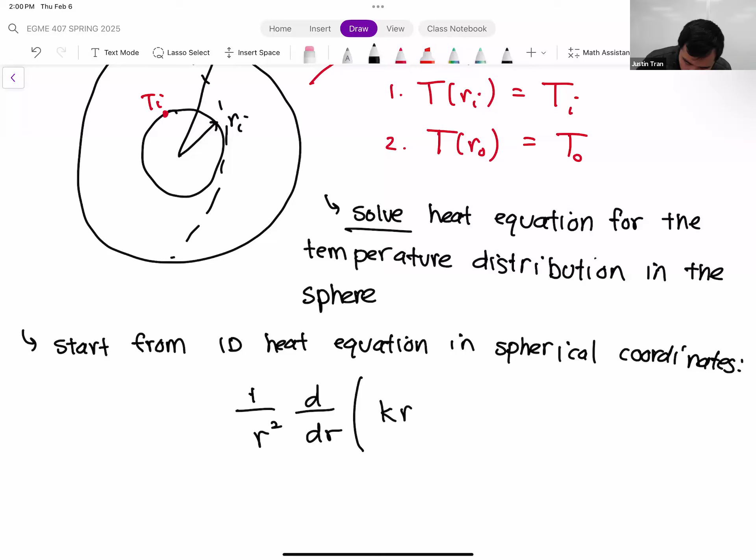Okay, let's go ahead and solve. Let's start from the 1D heat equation in spherical coordinates: 1 over r squared, d/dr of (k r squared dT/dr) is equal to 0.

We're going to integrate this twice, but the addition of all these r terms will make it a little more complicated than usual. This looks very similar to our cylindrical heat equation, except instead of r, we have r squared in both of those places.

So first, so that we can take that first integral with respect to r, let's multiply both sides by r squared. Another thing I'm going to do in this first step is factor out the k, since thermal conductivity is just a constant, so we can pull it out of that derivative and multiply both sides by r squared over k.

That's going to cancel out this r squared here -- I put the 2 in the wrong place -- so that r squared cancels with that r squared, and that k cancels with that k because we pulled it out of the derivative. What we're left with is d/dr of (r squared dT/dr) is equal to 0.

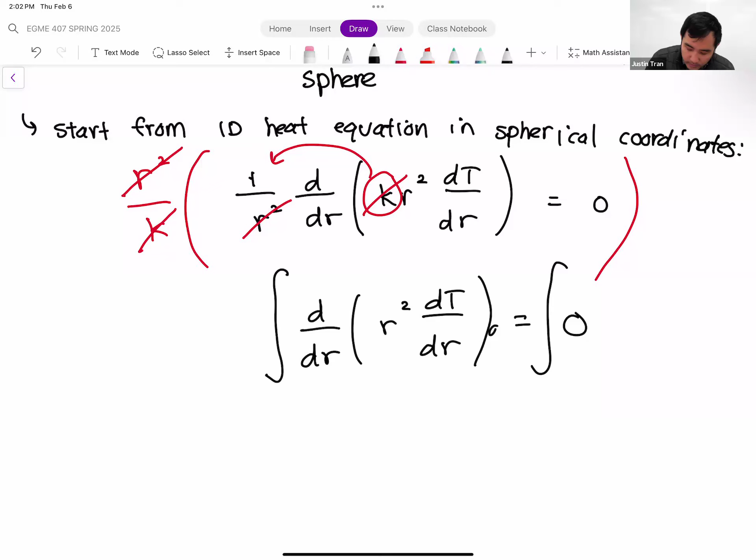On the left-hand side, we just have a simple cancellation of the integral and the derivative, so we have r squared dT/dr is equal to the integral of 0, which is just 0. But since we're doing an indefinite integral here, we have to add our arbitrary constant, C1.

Before we can perform the next integral, let's divide both sides by r squared. That gets rid of the r squared on that side, and on the right-hand side we have C1 over r squared. So we have dT/dr is equal to C1 over r squared.

Let's take this integral one more time. We get T(r) is equal to the integral of C1 over r squared, which is minus C1 over r. But since C1 is still arbitrary at this point, we haven't assigned its value, so I'll just lump that -1 together with it. So we end up with C1 over r plus C2.

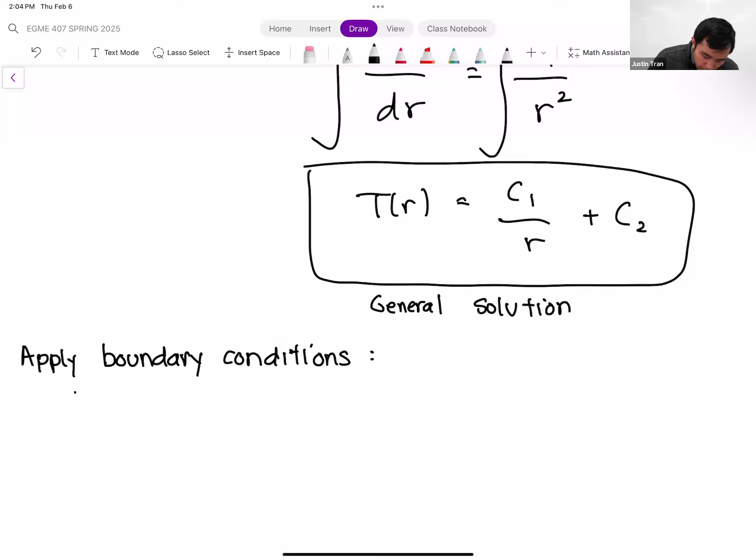Okay, so first we have T at R equal to Ri, that's equal to Ti.

So if we plug that in, we get C1 divided by Ri plus C2. Our next boundary condition: T when R is equal to Ro, this is equal to To. That's C1 over Ro plus C2.

So we have two equations here to solve for our two unknowns, C1 and C2. Let's go ahead and solve this system. My usual trick here, since we have a positive C2 on both terms, let's subtract these two equations.

Subtracting these two equations, we have Ti minus To is equal to C1 over Ri minus C1 over Ro. The two C2s are going to cancel out.

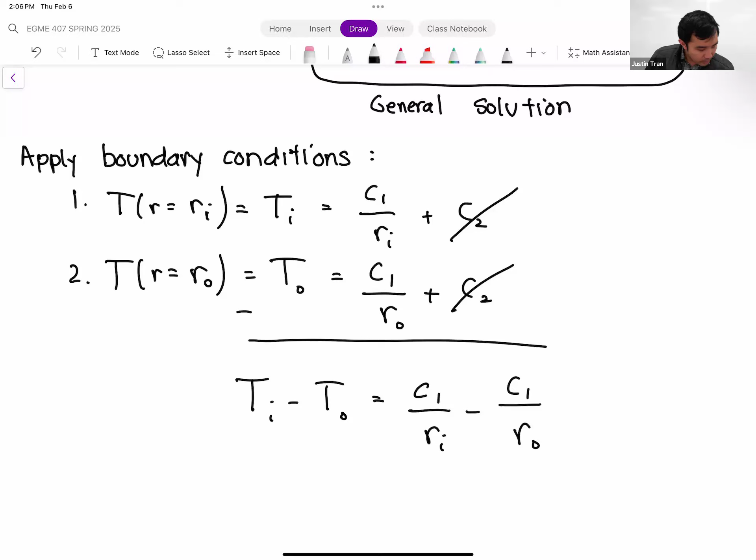We can take this expression and solve it for C1 very easily. On the right-hand side, we factor out C1, so we have C1 multiplied by the quantity 1 over Ri minus 1 over Ro, equal to Ti minus To. We simply divide both sides by the quantity in the brackets, which gives us our expression for C1: C1 is equal to Ti minus To divided by 1 over Ri minus 1 over Ro.

So that is our expression for C1.

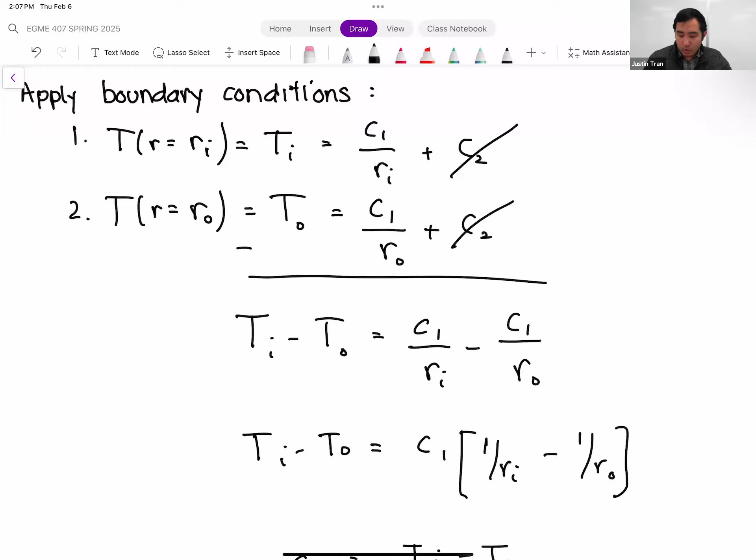We can now take this expression for C1 and plug it back into either of these equations to solve for C2. I'm going to take this and plug it back into equation 1. What we get is 1 over Ri multiplied by C1, which is Ti minus To divided by 1 over Ri minus 1 over Ro, plus C2, is equal to Ti.

We're just going to subtract that first term, that big term, to solve for C2. So we get C2 is equal to Ti minus 1 over Ri times the quantity Ti minus To divided by 1 over Ri minus 1 over Ro.

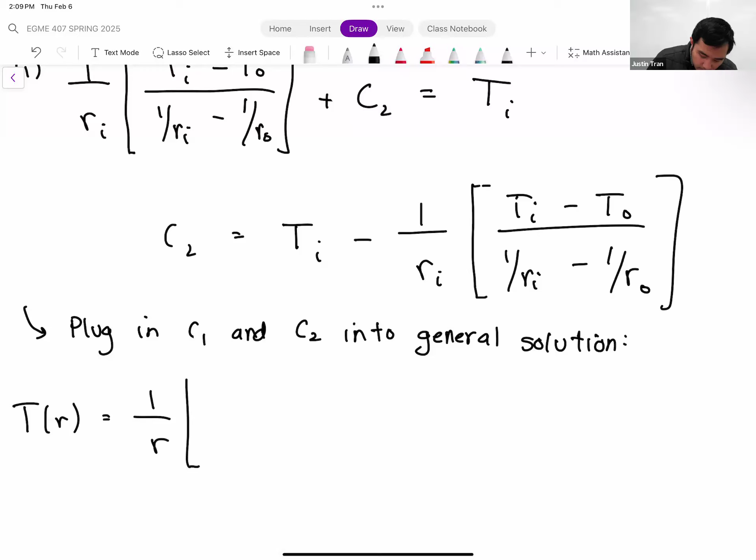We plug this back in, and then we're going to get our expression for the temperature distribution. So we plug C1 and C2 back into our general solution. T of R then is equal to 1 over R multiplied by Ti minus To divided by 1 over Ri minus 1 over Ro, plus Ti minus 1 over Ri times Ti minus To divided by 1 over Ri minus 1 over Ro.

So this right here is our final solution. If you look into the textbook at the answer to this example, because this example is very classic, they're going to have a different form of the solution. That form and this form are one and the same, just the other form has been massaged algebraically a little bit - they've rearranged some terms, combined some like terms, just to make it more compact. But this one is perfectly valid, and it's the one you get directly from solving for C1 and C2.

Any questions on this?

Last thing I want to do before we leave is, just like we did in the cylindrical system and just like we did in the planar system, let's take this expression here and use it to derive a formula for the thermal resistance for a sphere.

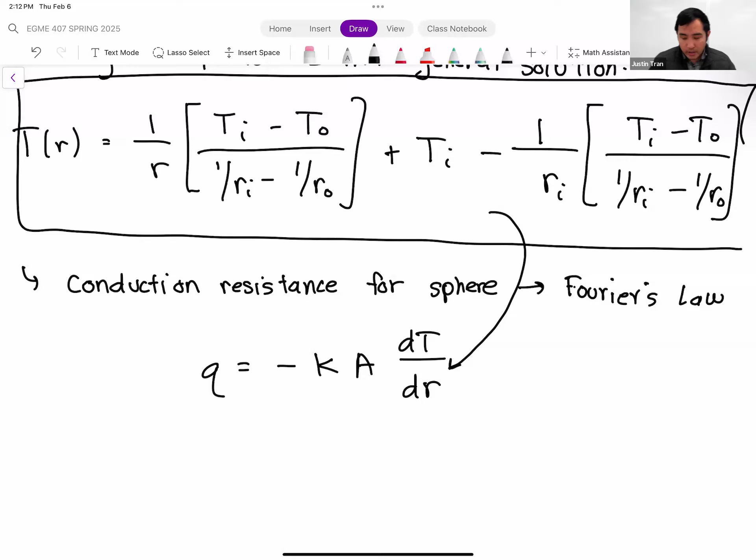Now for dT/dr, we're going to plug in the expression we have above. We're just going to take the derivative of this expression with respect to r. You're going to see that a lot of the terms are going to cancel out, so it's actually quite simple. The other thing we need to plug in here is the area - just like we saw with the cylinder, this area is the surface area of a sphere.

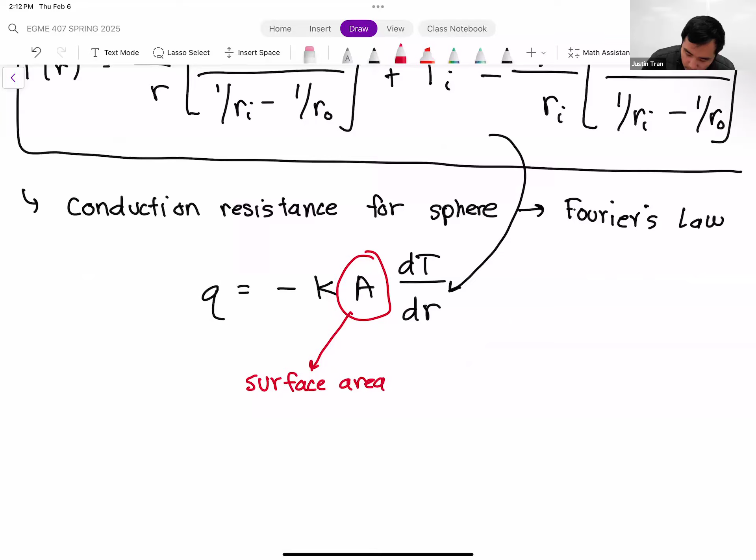It's going to be the surface area of a sphere with radius r.

This formula might be a little bit less known because typically we don't work with spherical systems all that much, so I'm just going to go ahead and give it to you. The surface area of a sphere is 4 pi radius squared.

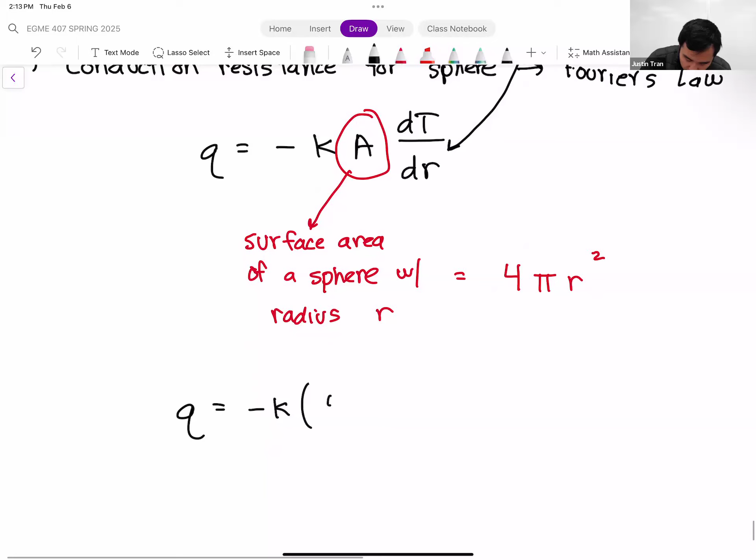So let's go ahead and plug everything in here. If we plug that in, we get Q is equal to minus K times 4 pi r squared. We're going to take the derivative of our temperature distribution with respect to r.

If we come back up to this temperature distribution, we're going to take the derivative with respect to r, which sounds scary, but the only term here that has the radius is this first term. So this entire term here, when we take the derivative, is just going to cancel out, because all of those other terms are just constants.

And then we take the derivative of that first term, we get minus 1 over r squared multiplied by C1, which was Ti minus To divided by 1 over Ri minus 1 over Ro.

And so a bunch of this is going to cancel, right? We have r squared canceling with r squared, and the negative canceling out with that negative.

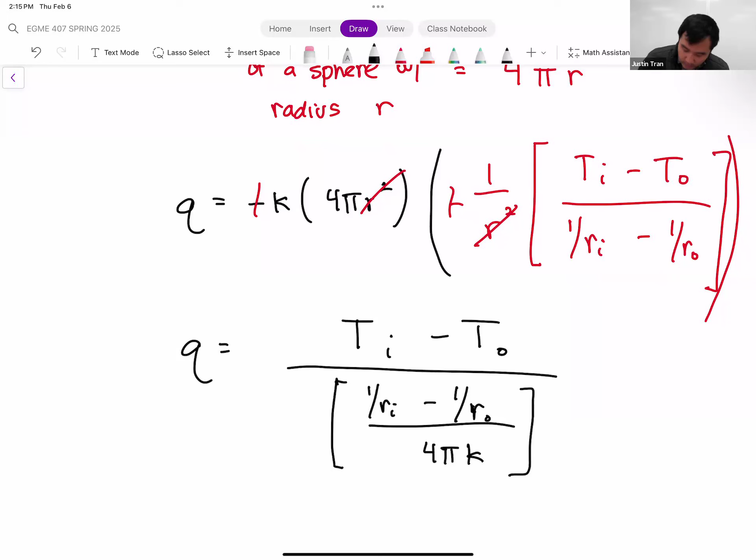Just because we're almost out of time, I'm going to rearrange this. So we have Q is equal to Ti minus To divided by, let me put this in square brackets because it's a little bit messy, 1 over Ri minus 1 over Ro, divided by 4 pi K. That 4 pi K came from the numerator on the previous one, but I just put it in the denominator here so it can all be together, because this quantity right here, this is the conduction resistance of a sphere.

When we come back on Tuesday, I have one more example with the heat equation for a sphere for you. This one has thermal production, so that'll actually be useful for your homework for the next one that I'm going to post. And then we'll do a very quick example using thermal circuits for a sphere.